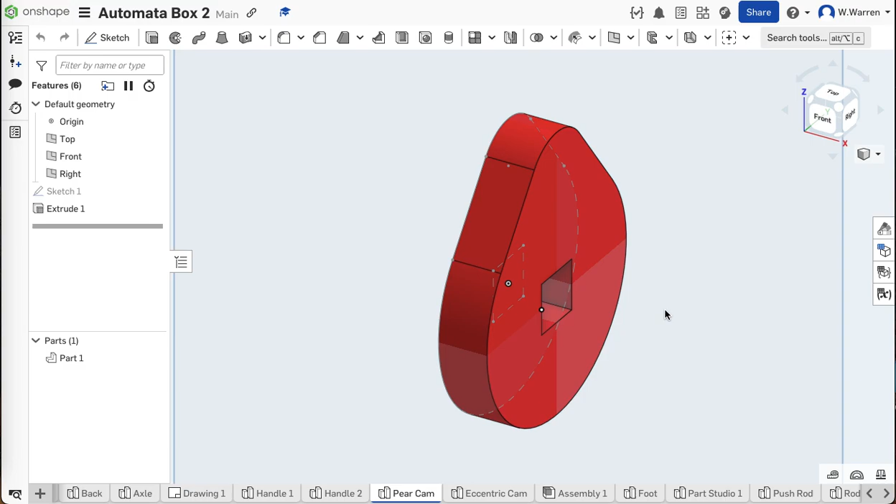Okay, so first and foremost, let me put this animation away, and I would like to very quickly look at the handle or the axle or the cam. Any of these items here have this hole to slide over the square axle we're using. And I would like to remind you that the axle is 0.25 by 0.25, and so let's make this hole 0.27 by 0.27 so we don't get interference. Just friction. When we put it on, we'll be able to actually physically slide it on to the shaft.

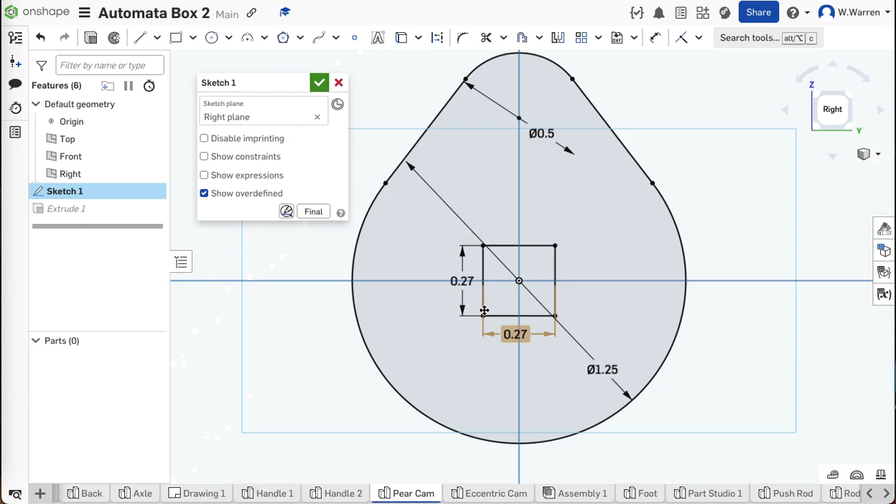So make sure this hole is 0.27 by 0.27 for anything that goes on the axle, and that is the cams as well as the handle. Right, that should be a 0.27 by 0.27 hole. I guess I did the hole in sketch 2. There it is. Oh, I did this one 0.26. I'm going to change it. 0.27. 0.26 may work. I think it's going to be just a little too tight. Let's go 0.27 for that square hole.

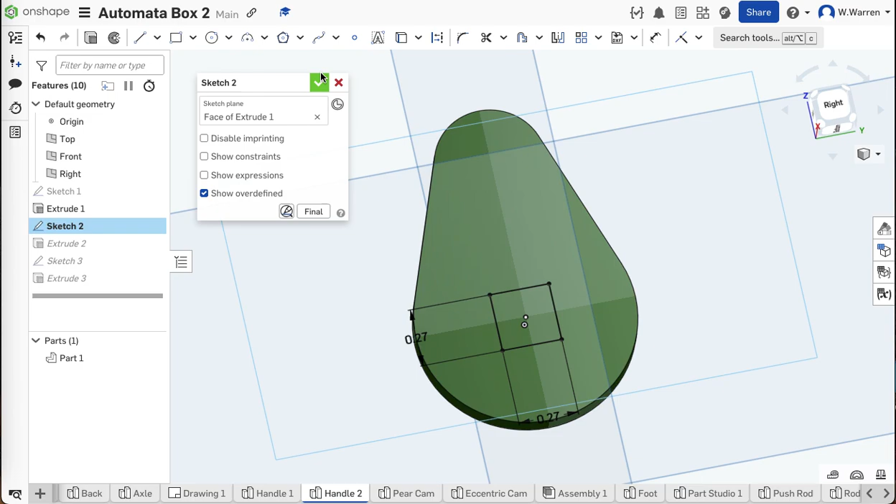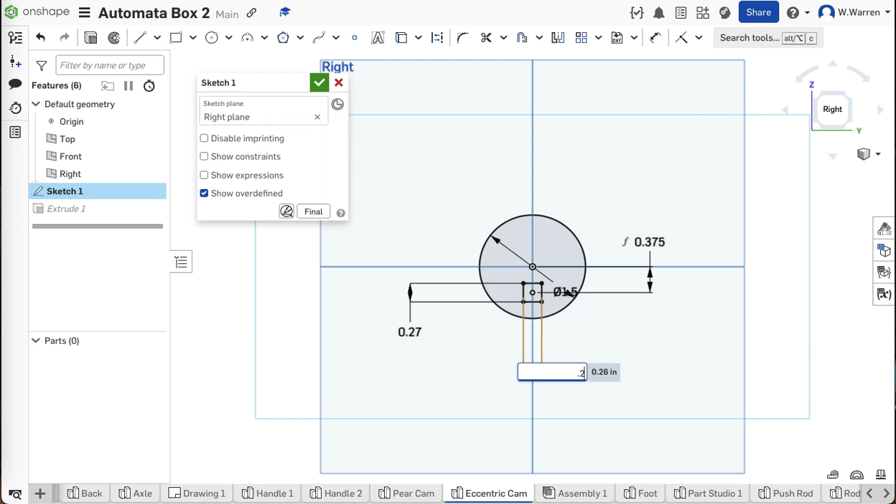And let me check my eccentric cam, make sure that's good too. So handle's good, pear cam's good, eccentric cam. What size do I have this hole as? Double check. I also have it as a 0.26er. Again, let's make it 0.27. Not sure if 0.26 would work. It might, but it might not. 0.27 does. Okay, so I've made that hole just a tiny bit bigger, so it actually slides on the physical shaft when we actually build the physical box. Okay, so that took care of the hole sizes there.

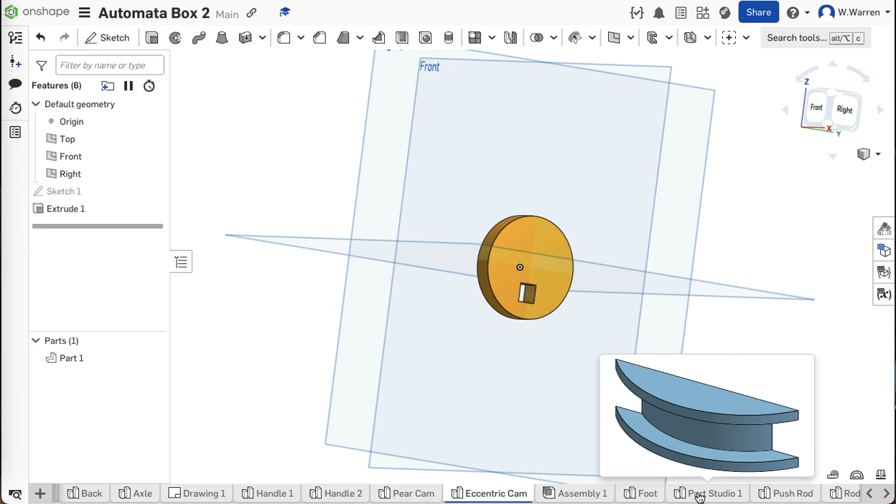Let's look at the hole size in both the feet and the rod guide. Did I not name my rod guide properly? There's a foot. There's another foot. That must have been an example foot. Oh, there's the rod guide. Rod guide is right here, and that hole has to accept the rod. Now, the rod really is 0.25 inches across, oh, sorry, no, it's half of 0.25. I'm sorry. It's 0.125 across. The rod is 1/8 of an inch, which is 0.125 inches, and my first instructions were make this 0.13, and that is not big enough.

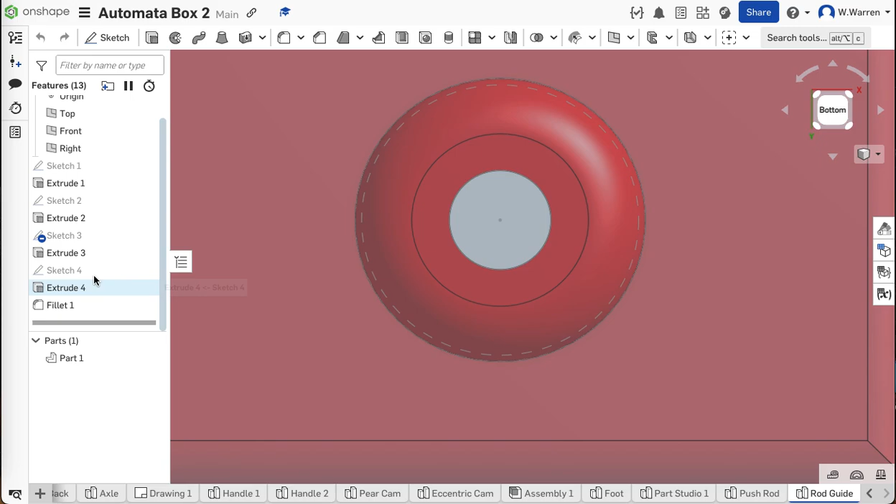Right? These holes have to be, let me see which sketch it is. I think it's probably the sketch here. Nope, that's just the outer thing. Sketch 4 maybe, there it is. Yeah. So I instructed you to make that hole 0.13, and when we actually physically tried to get the push rod into the 0.13 hole, in theory it fits, but in reality it doesn't. The plastic probably expands a little when it heats up, etc. So we need to make this hole 0.18, right? 0.18 inches. You may have that as 0.13. Go make that 0.18 so the rod slides through it well.

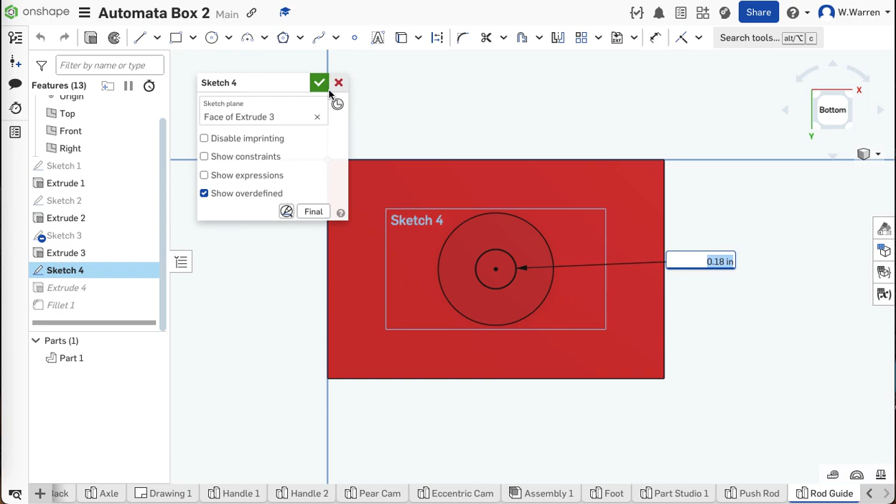And same thing with the foot. You're going to put that hole right there. Again, that 1/8 inch rod has to fit into that hole, and somehow 0.13 is not quite big enough. Again, probably just expansion of plastic due to heat. But let's see what I have this one as. I think that's probably sketch 2. No, sketch 3, sketch 4. It's going to be the last sketch. There it is, sketch 5. I did change it yesterday. 0.18 also. You may have that as 0.13. You're not going to get the rod in there if it's 0.13.

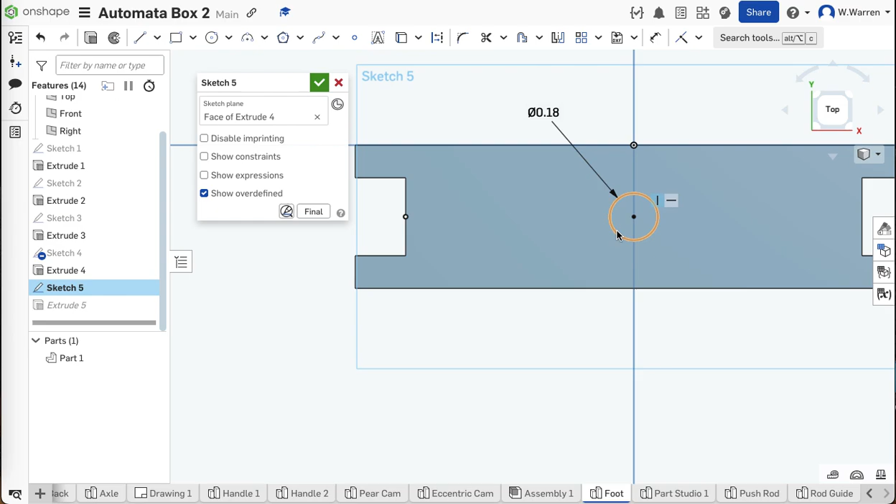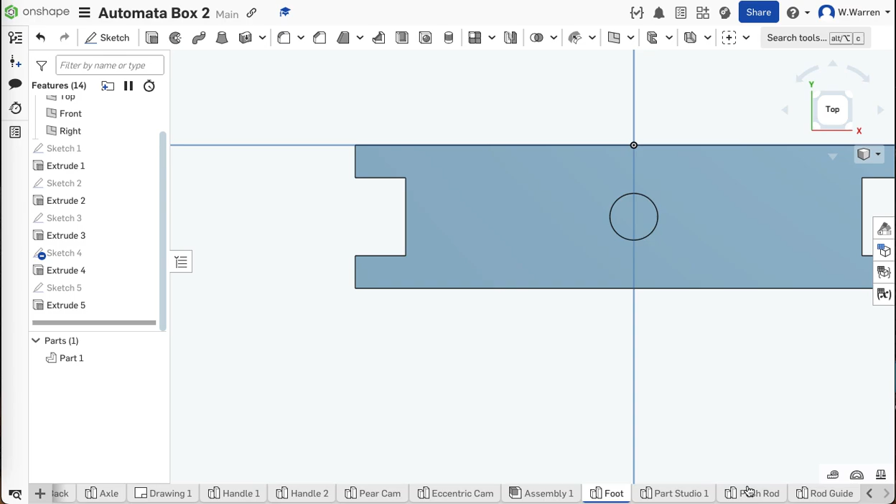This one doesn't matter if it's a nice tight friction fit. You could probably do 0.17 here. In fact, I bet you could. For the guides, though, we want it not to have really a friction fit. We want it to slide up and down in the guide. Here, if you have to jam it in there, that's fine. We're going to put a spot of hot glue in there anyway. So 0.17 or 0.18 for the foot hole, and 0.18 for the rod guide hole.

Again, things with nice smooth curvature all the way around seem to accept the tangent mate more readily than things with varying curvatures. But I did get it to work just by flipping that over, that black arrow. So give that a try if you're having trouble with your tangent mate.